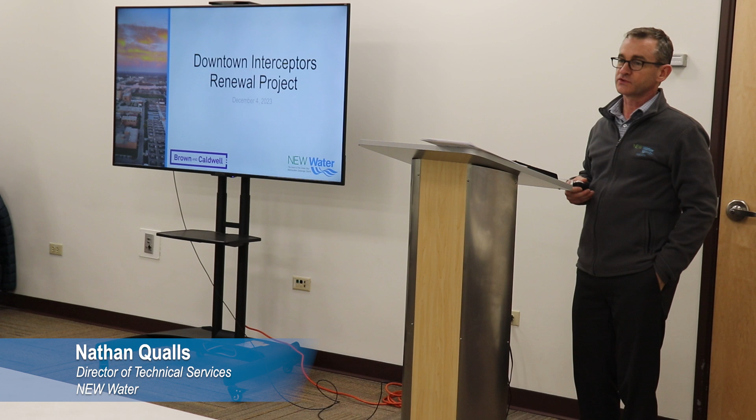My name is Nathan Qualls. I'm Director of Technical Services with New Water. We're here to talk about our downtown Interceptors Renewal project. I appreciate you taking the time out of the evening to learn about this really important project.

I'll do some introductions, a little background on New Water, what it is we do, who we are, before jumping into a lot of project details—overview, planning, design, schedule, cost, those kinds of things. Adam Shelton from Brown & Caldwell will cover that for us.

Again, I'm Nathan Qualls, Director of Technical Services with New Water. You may have met Lisa Sarau, staff engineer at New Water, who is our project manager and main point of contact coordinating and leading this project. And Adam Shelton from Brown & Caldwell is the project manager and design manager, our main point of contact for this particular capital project.

So who is New Water? You may not have heard us called New Water before. You may have heard us called Green Bay Metropolitan Sewerage District—that's our legal name, that's our entity. We are a public utility providing wastewater conveyance and treatment for 15 municipalities here in the region.

You see, for example, the city of Green Bay—they're our largest municipal customer. Allouez, Ashwaubenon, and the surrounding towns through their sanitary districts. That's who we serve, doing wastewater conveyance and treatment.

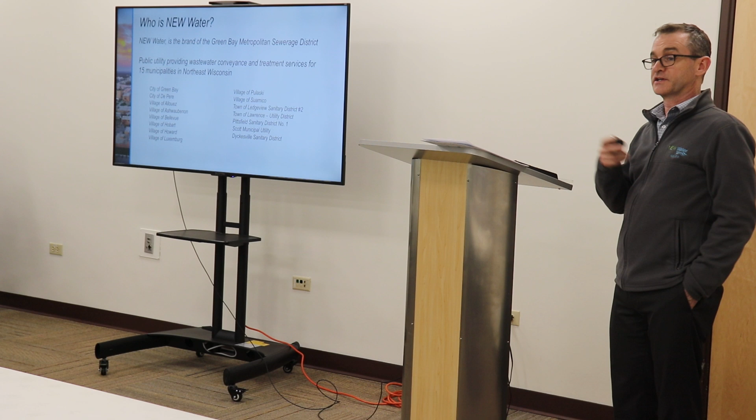This project is focused on the conveyance part. That's why we're primarily doing public engagement at this point, because it is outside of our fence and out in the community that we serve.

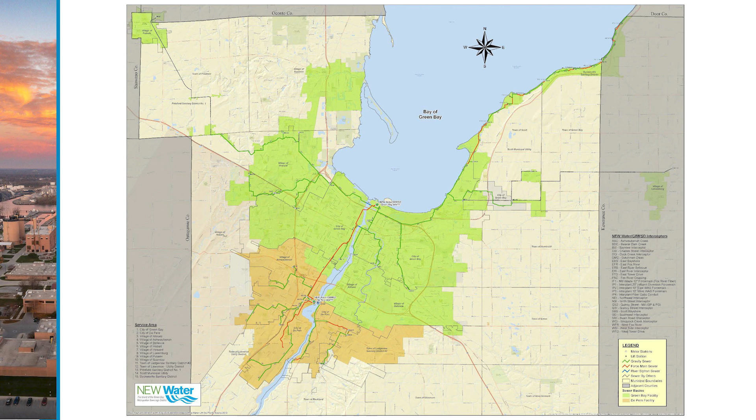We are responsible for both of those treatment facilities. That location is near Ashwaubenon Park and the Brown County Fairgrounds. We've proudly been serving this community since 1931.

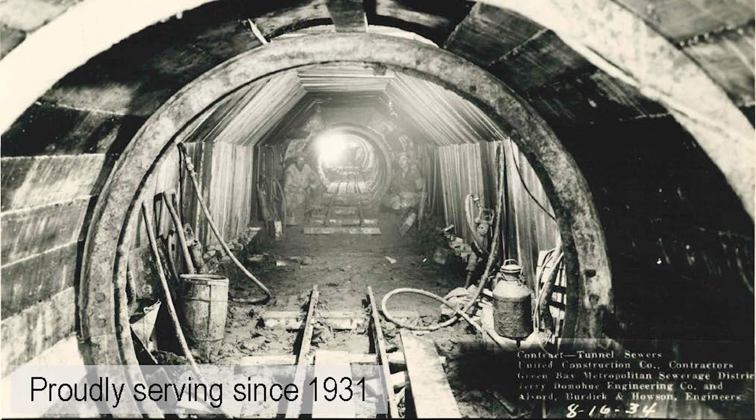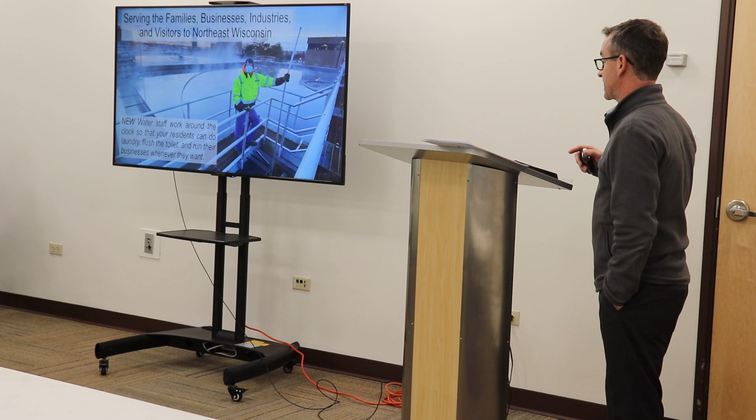We do that around the clock, 24/7, 365. We make this possible by conveying wastewater to these two wastewater treatment facilities. We do it in the cold, we do it on those hot days, to make sure you can enjoy those services anytime you need them.

Last year we cleaned about 15 billion gallons of water. It's a lot. We operate those two treatment facilities and 78 miles of interceptors. When I say interceptors, that means the big pipes.

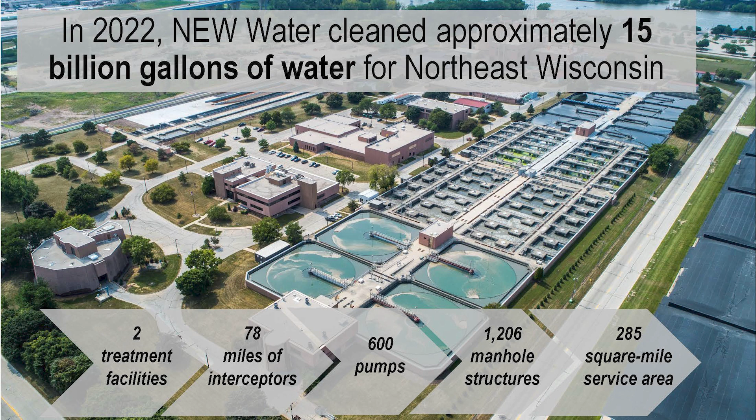So your municipality—for this example, the city of Green Bay—owns and is responsible for a lot of the sewer pipes in that neighborhood. However, once that wastewater combines with wastewater from a different community, then we own the pipe.

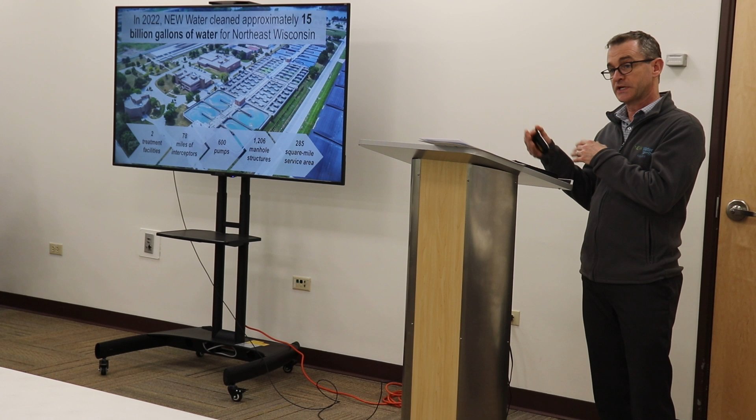So as wastewater enters from Allouez, for example, into the city of Green Bay, New Water owns that larger pipe to convey the wastewater to the treatment facility.

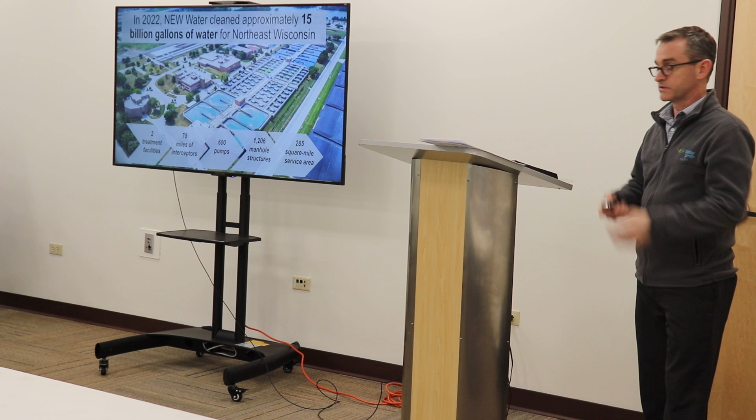We do this with the environment in mind, protecting public health and our public waterways. This is our mission and our vision, and it drives everything we do at New Water. But I'll go ahead and hand it off...

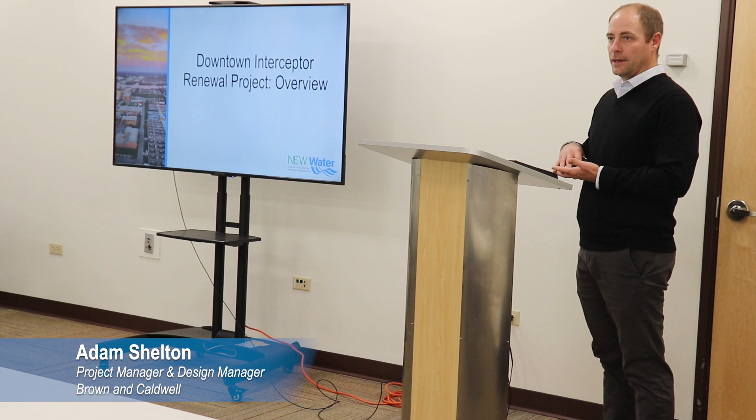I'm going to talk about the project overview—the project need, what we're going to do, what the project entails, and how that impacts all of you. First and foremost, as Nate mentioned, New Water's been around since 1931, and these downtown interceptor sewers have been here since the 1930s.

That's when they were constructed. Typical design life for a concrete sewer pipe is about 75 years.

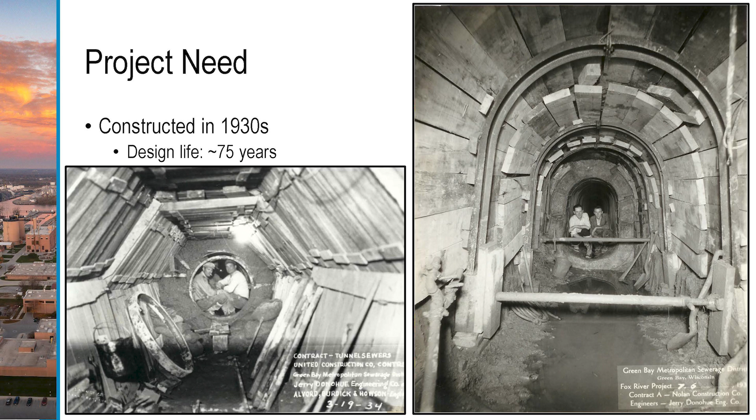So you do some quick math on that, and these pipes have kind of exceeded their design life. They've performed admirably up to this point. That is one project need—simply the age of the pipeline.

Next is condition. During the routine maintenance and inspection program that New Water has, they found what we call defects in the existing interceptor sewer system. A defect doesn't mean the pipe is collapsing or anything like that.

It's just a variance from the original constructed condition, and so we're going to address those defects.

A couple of those are inflow and infiltration—that's in the lower left-hand corner. You can see what we call a gusher, with groundwater coming into the pipe. That groundwater is then conveyed to the treatment facility, and New Water has to treat that groundwater. It's expensive to treat water.

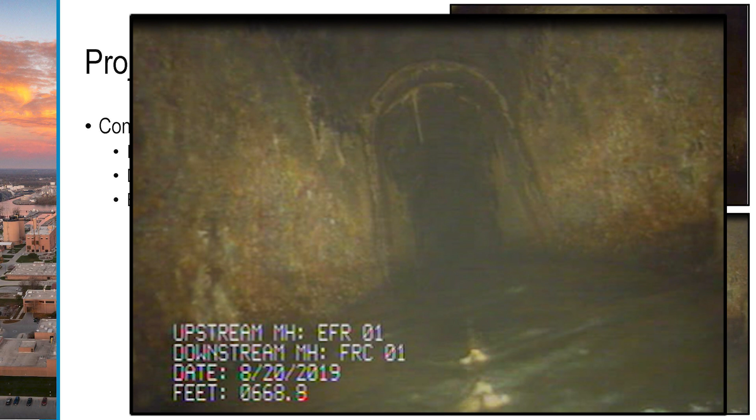We want to try and eliminate that inflow and infiltration. Second, in the lower right is some deterioration of the existing interceptor sewer system. There's some orangish, reddish coloring there - that's the existing concrete of the sewer getting eaten away by bacteria in the wastewater. So we're going to take care of those structural defects as well.

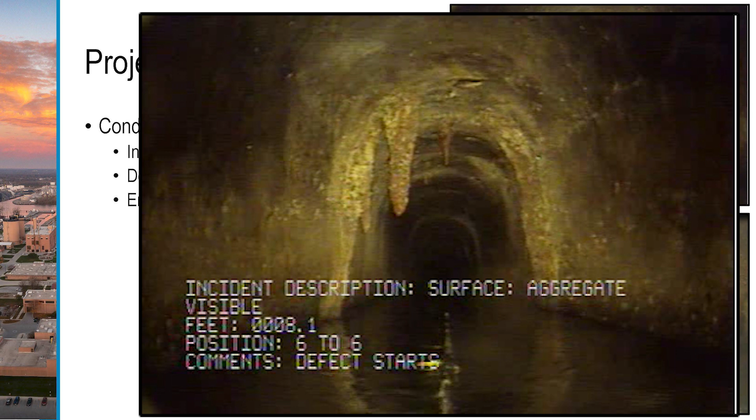Then there's these encrustations, in the upper right here. These happen from the inflow of groundwater as well - calcium builds up. It limits the capacity of the existing interceptor sewer and can cause blockages. So it's best to take care of those before they get out of hand.

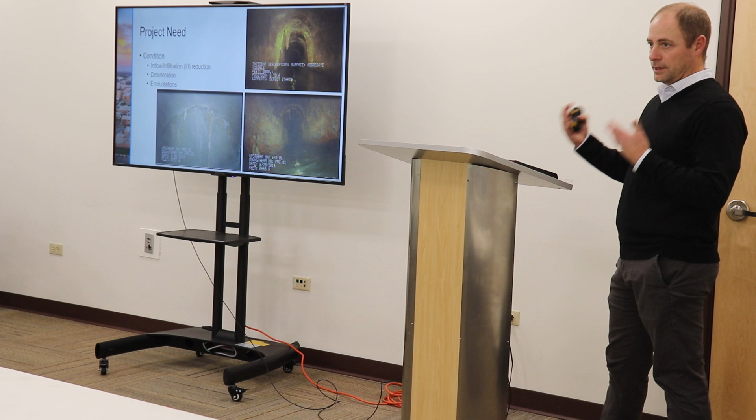There's another need: condition of the existing interceptor sewer. Lastly, these are the downtown interceptors, considered critical infrastructure. These pipes that you see - green, pink, and blue - convey a little over 50% of the entire Green Bay metro area's wastewater. If something were to happen to one of these, we would have a problem on our hands. So proactive projects and maintenance is the best way to handle this. Critical infrastructure is your final need there.

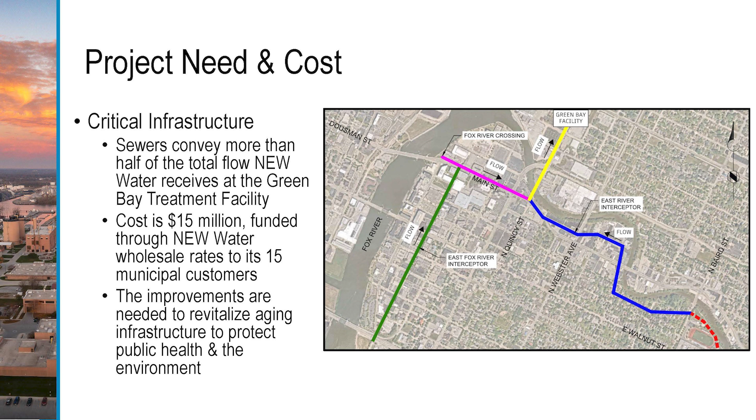Cost of this, we're estimating about $15 million. That'll be paid for by the 15 municipality customers that Nate mentioned in one of the earlier slides. Those improvements are just to revitalize this aging infrastructure, extend that design life, protect public health and the environment through the proper conveyance and treatment of wastewater. That's your project need there.

I know we looked at it a little bit about where the project is located. So this is the entirety of the project. It's far-reaching, maybe difficult to see from where you guys are sitting, but we're calling this the downtown interceptors because it's primarily in downtown Green Bay, and a little bit in the village of Allouez. We've got them color-coded, and I'll go through them briefly here. We'll cover these a little bit more.

The Fox River Crossing is up at the top, generally under Main Street, from Hampton Inn over to Quincy Street. There's the East Fox River Interceptor, generally under Adams Street. Then the East River Interceptor is in two sections of blue, and I'll explain that once we get to that slide - those follow the East River, which is why it was named that. There's also a portion of that interceptor sewer that was abandoned back in the 1970s, and we're going to do some work to that too.

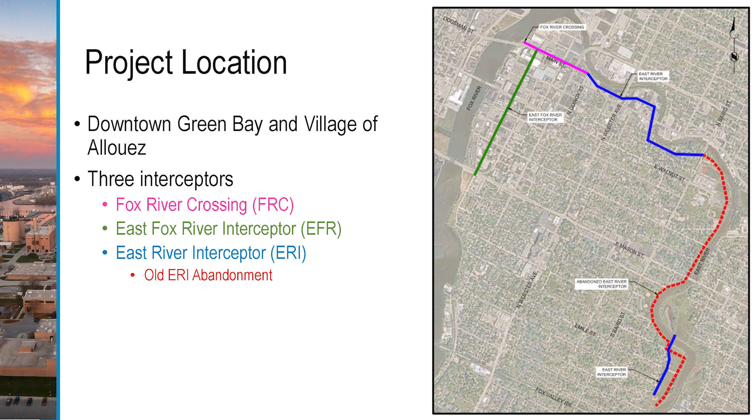So this project, we're calling it 3 different sites: the Fox River Crossing, the East Fox River, and the East River Interceptor. For the Fox River Crossing, we've got acronyms for everything - we're not the military, but engineers have acronyms for everything. So Fox River Crossing is the FRC.

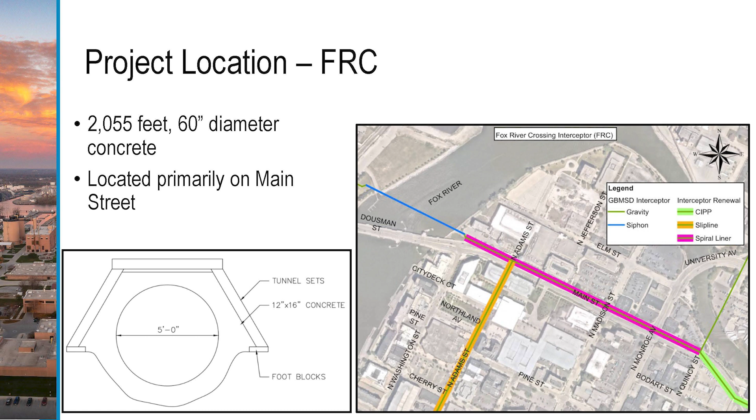A little over 2,000 feet of 60-inch sewer was installed in a tunnel. There's some photos over there of some of the tunnels that were constructed. As I mentioned, it's generally located under the north lane of Main Street.

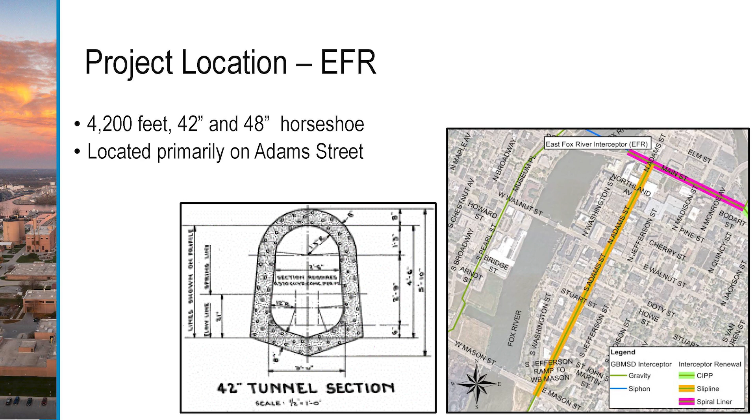The East Fox River Interceptor, generally under Adams Street, the west curb line of Adams Street, is about 4,200 linear feet of 42-inch and 48-inch pipe. That's the horseshoe pipe that was installed back in the 1930s.

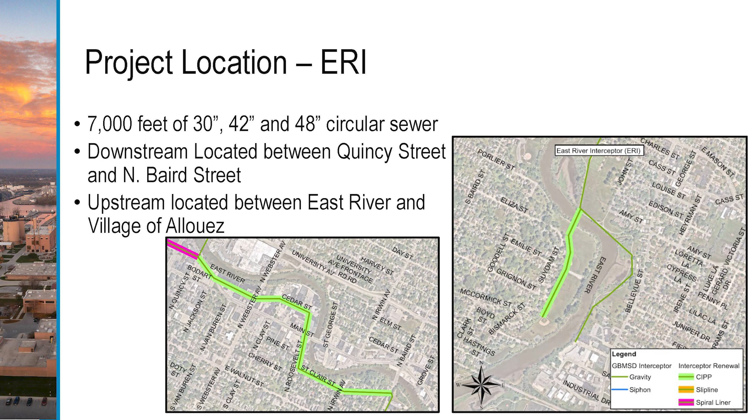The East River Interceptors we've broken up into 2 sections, the upstream and downstream sections. In total, that's about 7,000 feet of 30, 42-inch, and 48-inch pipe. The downstream section is between Quincy Street, roughly following the river all the way to Baird Street by the high school. The upstream section is in Green Bay Park's property by the East River, then up to the village of Allouez municipal boundary.

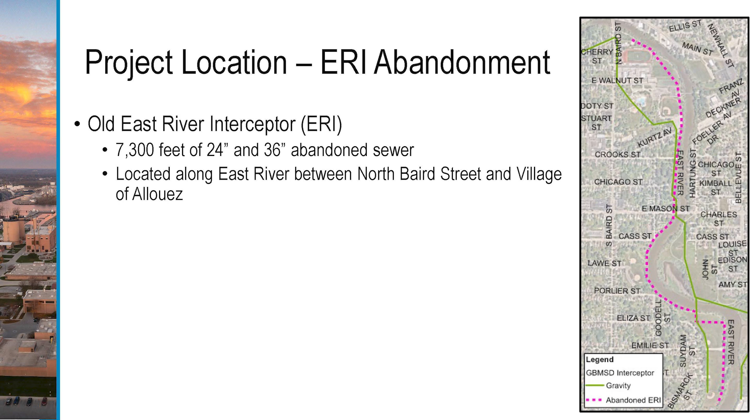I mentioned this abandonment. The old East River Interceptor was installed back in the 30s, but taken out of commission in the 1970s when the East River Bellevue Interceptor was installed. Think of it as decommissioned but not properly abandoned. There's potential to use these pipes to route other utilities inside - there's already a hole in the ground, but they haven't really been used like that. So we're going to properly abandon this old East River Interceptor - about 7,300 feet of 24 and 36-inch pipe, shown as that dotted magenta line following the East River.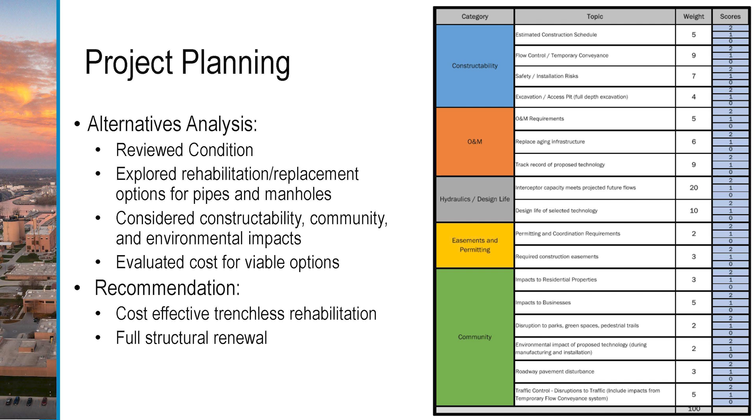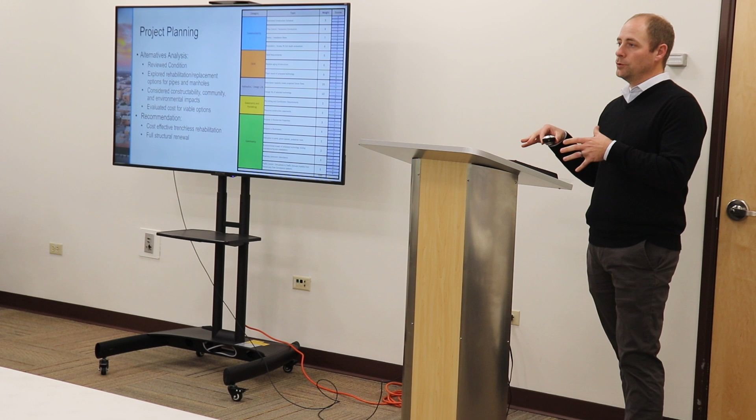That was pretty exhaustive, an arduous process. We came up with a recommendation to do a trenchless rehabilitation project. That's the most cost-effective way to give ourselves a new pipe, limit impacts to the community and environment, and it still gives us a fully structural, renewed pipe. So that's what we came up with, and I'll go over that project.

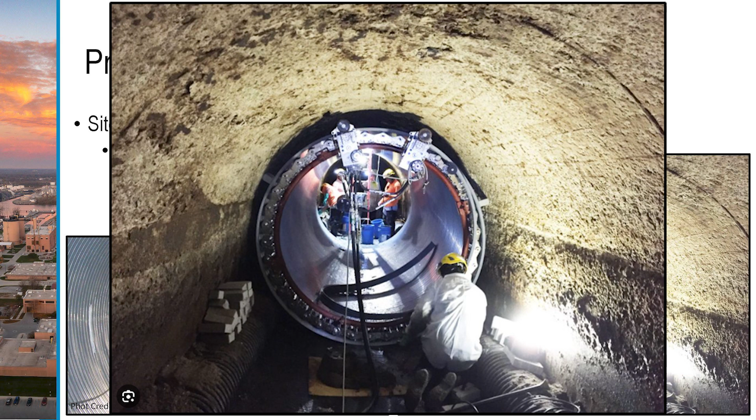For the Fox River crossing, we're going to do what's called spiral wound lining. I have a video that can explain it better than I can. The two photos here show on the right the installation process - you can see a deteriorated pipe with a new pipe being installed inside of it, and this is the final product. Let's go to this video, which explains it well.

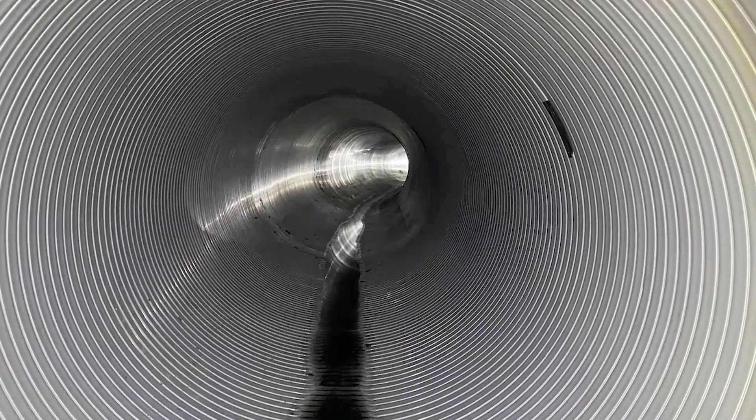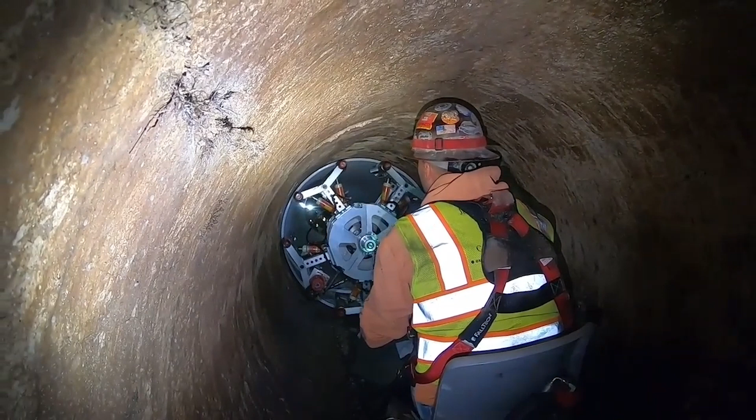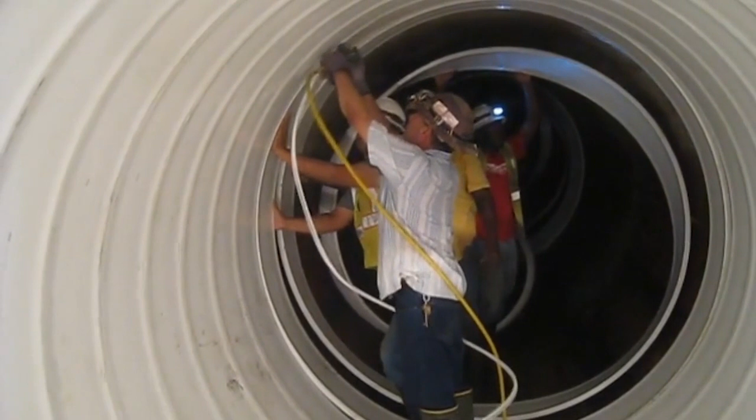Spiral wound lining is a trenchless technology method used to install a lining to replace deteriorated underground pipe without digging it up. In the simplest terms, it is a pipe within a pipe. Here's how it works: a liner constructed from PVC or HDPE is fed from spools through existing manholes or access points into the deteriorated pipeline. From there, the material is mechanically or manually locked together to form a new liner, capable of resisting all applied loads that, depending on the final design and condition of the host pipe, could extend the life of the existing pipeline for up to 50 years or more.

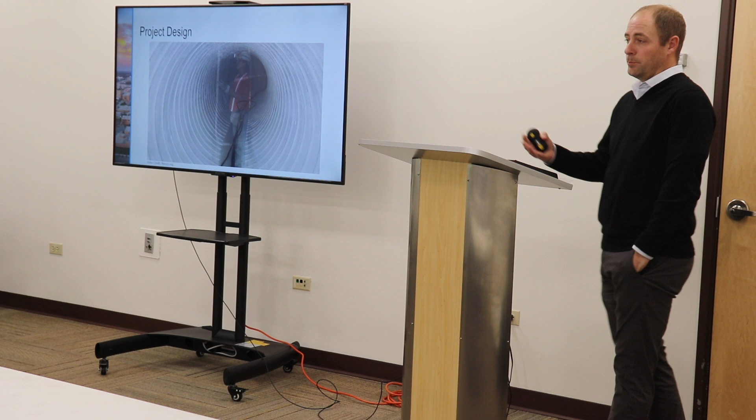So in essence, we're using the existing pipeline to give us at least another 50 years of design life from the existing interceptor sewer. This minimizes the above-grade impacts people see on a daily basis. It's a lot more cost-effective and less impactful than digging a new sewer. So that's what we're going to do on the Fox River crossing.

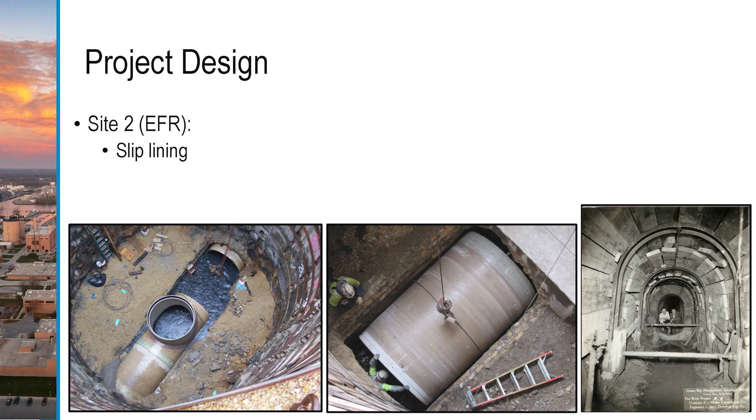The East Fox River Interceptor has that funny horseshoe shape you can see in the right photo, from the original installation in the 1930s. What we're going to do is excavate down in one location, expose the top of the existing pipe, and push a new pipe in each direction into the existing pipeline. There's going to be one excavation location, and we're going to rehabilitate the entire four thousand-something feet from that location. I've got a figure we can look at that shows this.

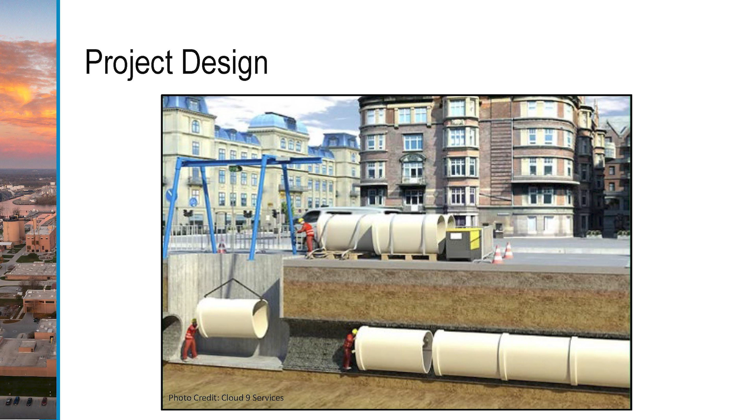Our excavation is here on the left, so we dig down to the existing pipeline. From there, you cut the top of the existing pipe off, start putting pieces of pipe in, and push them all the way down to the end - for 2,000 feet. So imagine this 4,200 linear foot section cut in half: you push 2,100 feet of new pipe one way, and 2,100 feet the other way. Then you put a keystone piece in there and fill that hole right back up. So again, a new corrosion-resistant pipe within the existing facility.

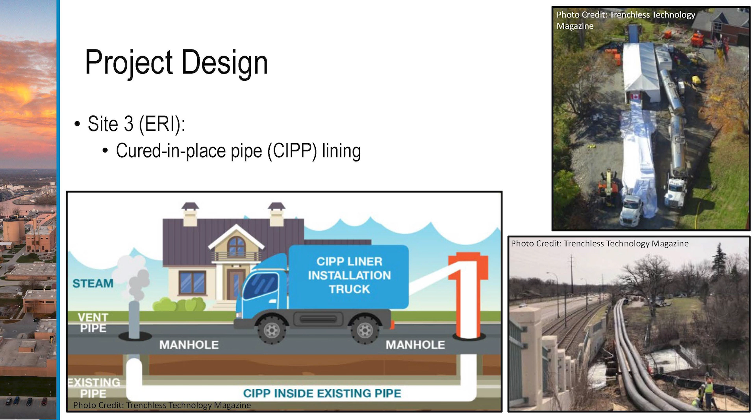Pretty slick, actually. The East River Interceptor is something New Water has done quite a bit of, which is cured-in-place pipelining. I have another video for this one, so I won't spoil it, but with cured-in-place pipelining, you invert a liner inside the pipe and cook it with hot water or steam, forming a new, almost PVC-like pipe inside the existing pipe. I'll show you a bit of that here.

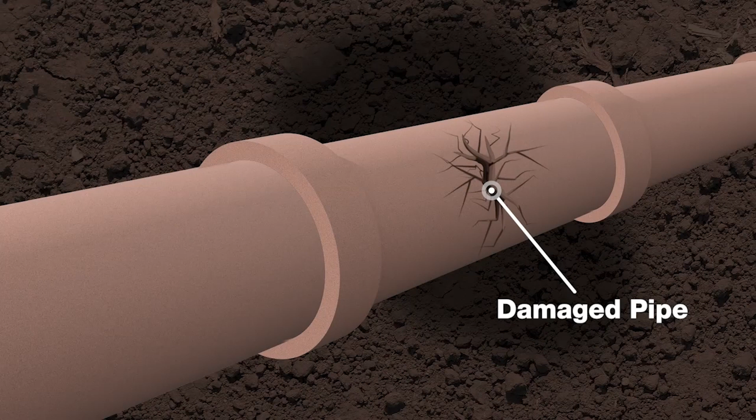CIPP is a method used to replace a deteriorated underground pipe without digging it up. In the simplest terms, it is a pipe within a pipe. Here's how it works.

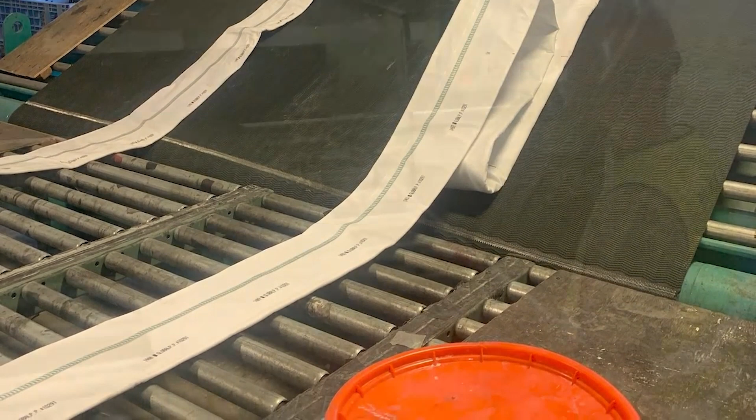A tube made of polyester felt or fiberglass, designed to the appropriate thickness and length for the application, is saturated with resin. This is also referred to as the wet-out process.

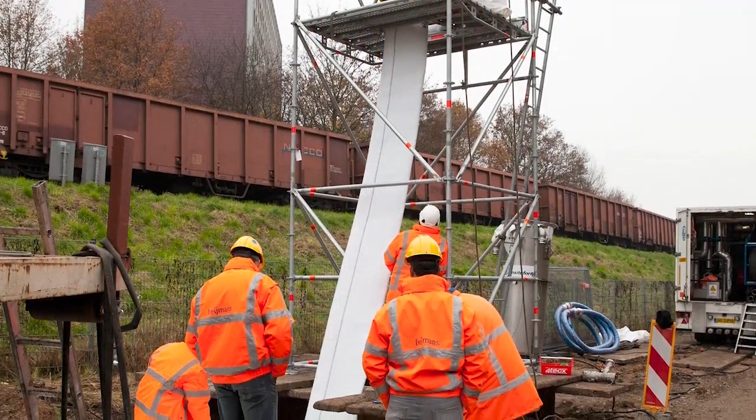The resin-saturated tube is then installed into the existing deteriorated pipe by inverting the tube into position using water or air pressure, or by pulling the tube into place and inflating it. Once in place, the tube is cured or hardened under pressure using either heat in the form of hot water or steam, or by using ultraviolet light.

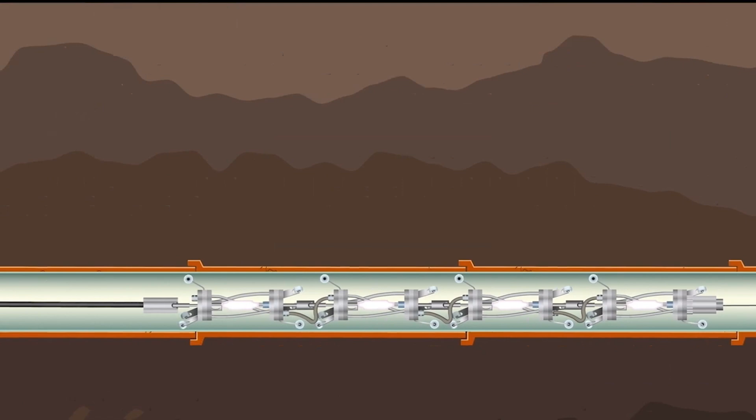So those are our three rehabilitation methods. We're also going to be rehabilitating manholes with fiberglass inserts. That's going to give us this whole monolithic, brand new system for the downtown interceptors, which means it'll be 50 years until we have to come back and revisit these pipes again. So it's pretty cool what we're doing.

The big part here is, how does this impact you guys? Fox River Crossing, this is going to be that spiral wound lining, done from existing manhole locations. The photo on the left is what you might see for staging, where they're inserting the spiral wound lining down to an existing manhole. You'll see a couple of support vehicles, a spool of PVC.

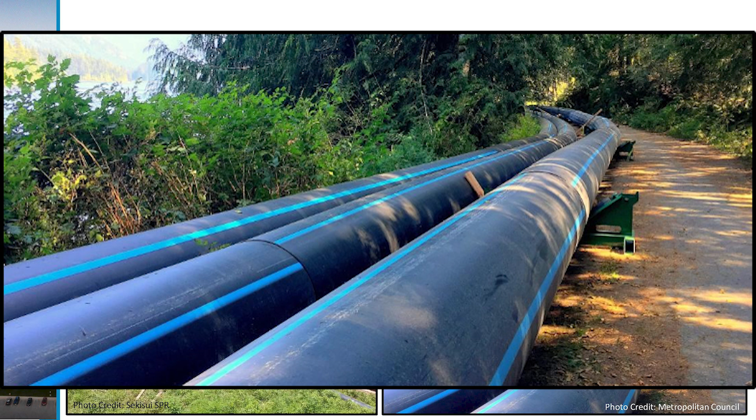That particular type of rehabilitation requires a partially dewatered pipe. The right photo is what we call temporary conveyance piping. You might see one or two of these above grade to keep the water level in the sewer low enough that we can do the pipeline rehabilitation. So those are the couple of things you're going to see there.

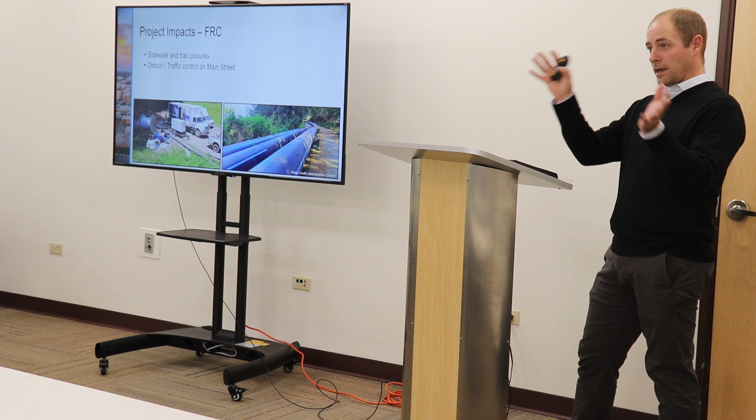For the East Fox River Interceptor, again, this is slip lining. We have that one large excavation area that we need to put pipe down into the existing interceptor sewer. So the slip lining insertion pit is really the primary disturbance. Because it's going to be a large excavation in the public right-of-way, there are going to be traffic impacts.

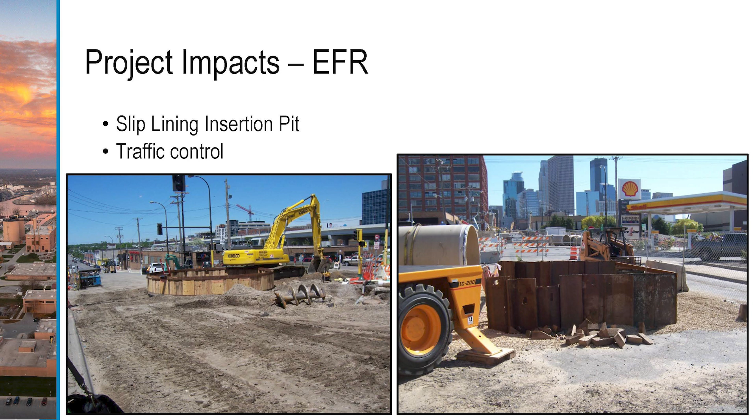With the installation of the slip lining insertion pit, you'll see excavators, support vehicles, there might be pipe staging, different stuff like that. There's going to be breaking up of pavement. So a lot of those normal construction activities is what you're going to see. This, again, is going to be on Adams Street downtown.

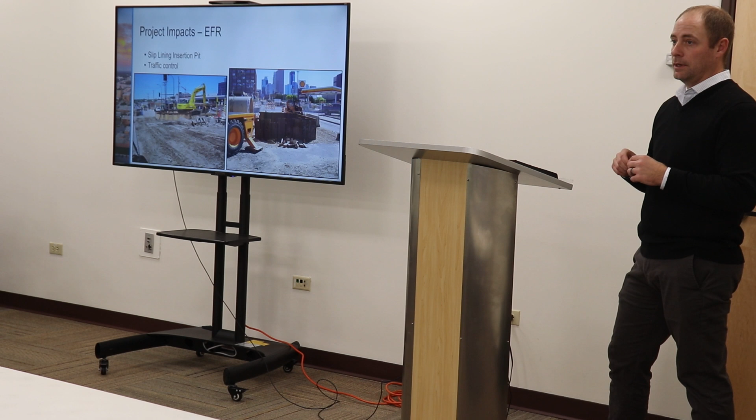For the East River Interceptor, this is cured-in-place pipelining. We just watched that video. A lot of that sewer is located in public parks, so City of Green Bay is on board. They've got a really good partner in this project.

So there's going to be some disruption to the parks and those trails that are associated with each of those parks that line the East River. There's also going to be some driveway and sidewalk impacts.

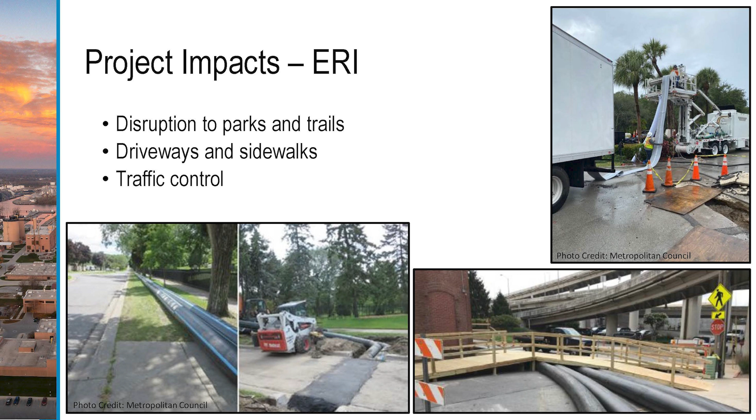The cured-in-place pipelining needs to be a fully dewatered pipe. There can't be any wastewater in the existing pipe, and the wastewater is always full. We're going to plug up the existing pipe, pump the water out, and it's going to go on these overland temporary conveyance lines that you see here.

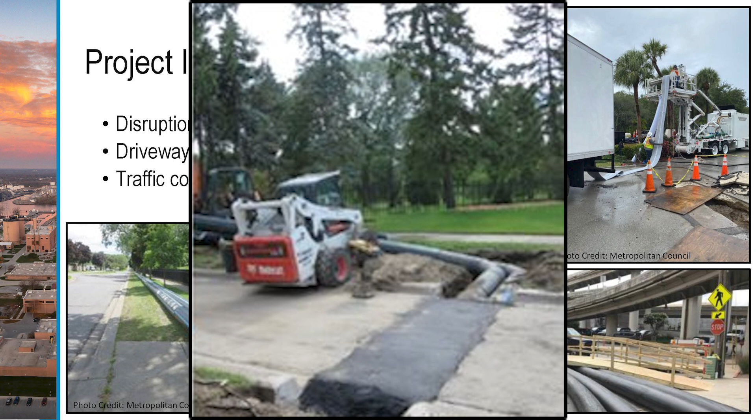At driveways and sidewalks, we'll bury these things that'll look a little bit like this. So there'll be some temporary pavement and stuff at driveways, sidewalks, and roadway crossings. With that, obviously, comes some of that traffic control that we were talking about before.

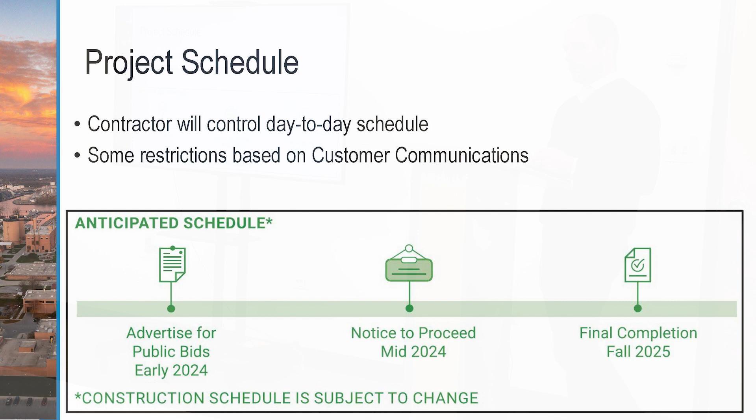Also, based on our work with Allouez and the City of Green Bay, we've got some restrictions built into our contract where the contractor can't work in the parks during the summer months. So we're going to try and force them to work in the parks during the winter, and there's some other restrictions like that as well.

If there's questions, if you guys had anything, we'd be happy to field some questions for you guys.